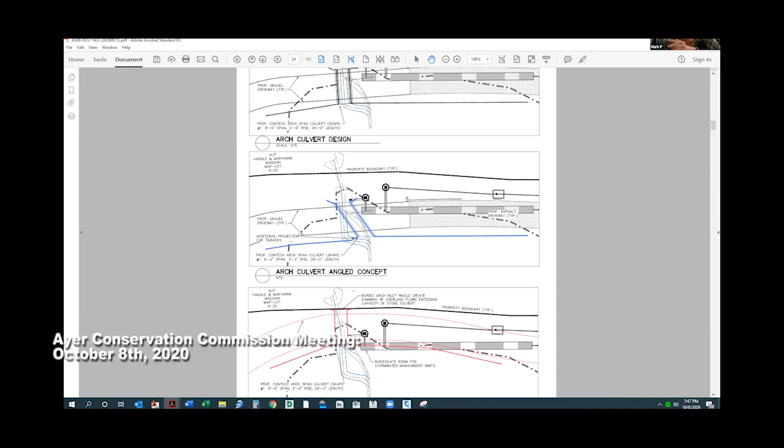Going back to the middle design, the angled culvert, the reasons you state this was not selected: increase of culvert length, width, and height, increasing footprint and disturbance; constructability conflict with wing wall tiebacks, further increasing disturbance; and practical construction tolerances for separations from the stormwater management system and water service line. The water service line is a line that crosses as part of the accommodation of infrastructure for the future residential lot.

So in brief, what happens if we start to turn this culvert is it becomes more difficult to construct, number one, and more costly, number two. And what we're trying to say by doing that is what we just left and came to this point to look at: the significance of this stream channel, which connects the BVW to an upland area, which are otherwise disconnected resources.

If we look back at the Oxbow habitat evaluation done in 2017 on this existing stream channel, it's not of good quality, not of any significant habitat value. What we put back when we install our culvert will arguably be much better habitat for anything crossing it. So by trying to preserve what's scrubbed in here, my argument is, number one, it's not a significant resource, and number two, it burdens the project with additional complexities which are harder to construct, result in more overall disturbance, and would probably require a different culvert system.

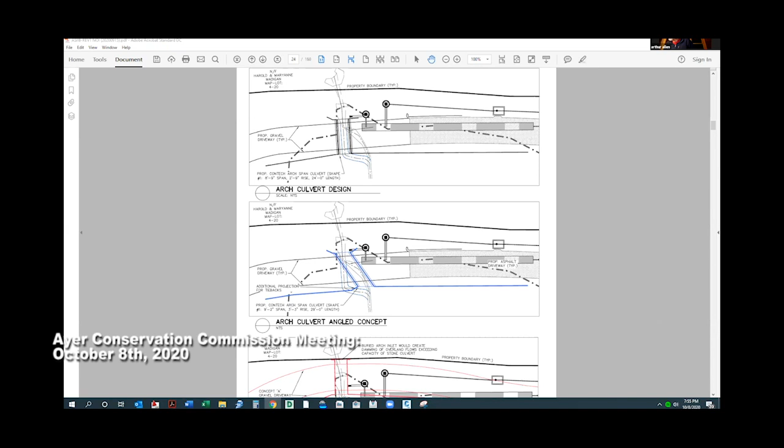If we refer to 310 CMR 10.54, the general performance standards include habitat characteristics, which I agree are negligible on this section of the stream.

But there are also physical standards for the bank, such as physical stability, water carrying capacity, groundwater and surface water quality. I don't see in his narrative that he specifically addressed those, but that's essentially why I'm saying this section of stream and stream bank has value under the Wetlands Protection Act.

The way that the stream crossing standards are integrated into that is that they say in 10.54.6 that the presumption of compliance with the performance standards for bank are presumed to be met if you meet the stream crossing standards. So it's not just the wildlife habitat characteristics we're talking about, it's also the physical characteristics of the stream bank that are in the performance standards and presumed to be met by compliance with stream crossing standards.

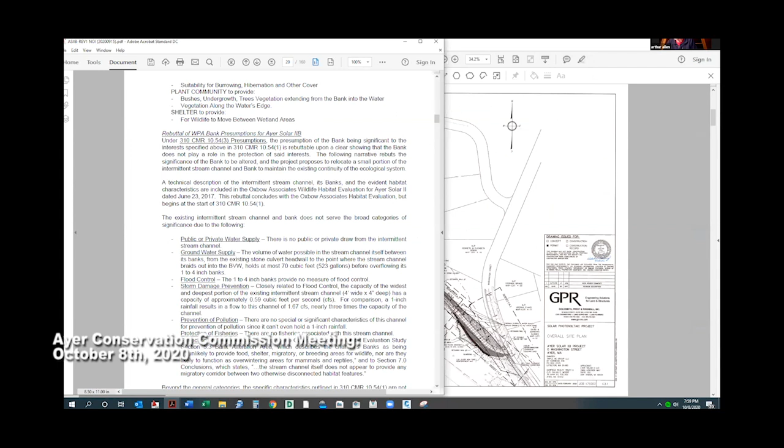I've actually never dealt with a case where it's proposed to meet the standards by realigning the stream and restoring it. Not that it can't be done, but I haven't dealt with that, and I don't know how DEP would view that. At this point I would really have to defer to the commission, noting that the reconfigured stream would meet the standards in the realigned stream, but they're not spanning the stream in its existing location.

I also asked Mike Andrade, who I believe is on the call, the peer review engineer, to opine on the feasibility of the angled culvert to preserve the stream crossing. I don't know if it's a good time for Mike to jump in, but he did have some comments on the feasibility of the angled culvert.

Chairman, if we could get to Michael, if I could just make one point first about what we're proposing, so that's clear to the commission. Art is correct about many things, but what we're proposing is the rebuttal of the bank presumptions, where in general standard number 4 it says where the presumption set forth in 310 CMR 10.54.3 is not overcome. So we are showing piece by piece, line by line, why this bank would not actually meet the presumptions set forth in 310 CMR 10.54.3. I just want to make sure we are clear on that.

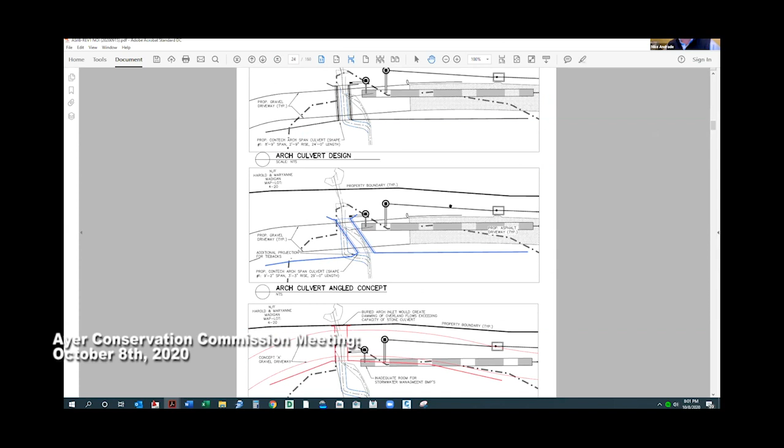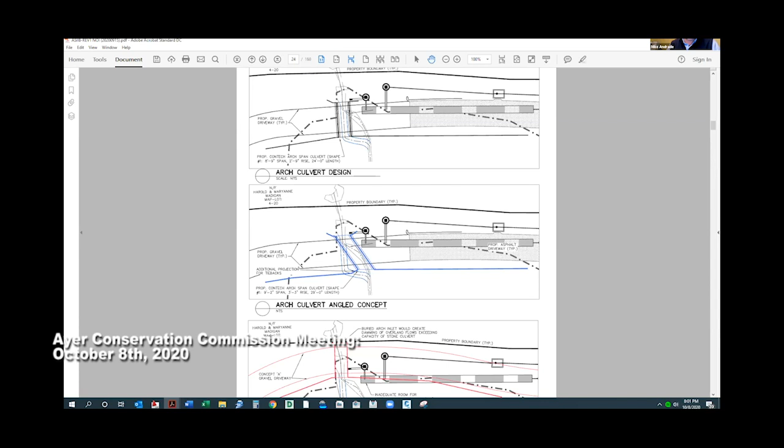So I have a letter dated October 6th which you should all have. And I'm down to a couple of minor issues myself that could be conditioned, in my opinion. We should maybe talk about item 20 a bit later, and my thoughts on that. I was asked to opine on the culvert configuration. Basically, in summary, the straight, which is proposed, versus the angled concept, they're both constructible, both feasible. In my opinion, the angled concept might result in more earth disturbance. It would require, based on the current design, some stormwater adjustments. But I don't see that it complicates the project any further. The site and design are already rather complex given the constraints of the site.

It would require some changes to the stormwater design, I'm sure. But to me, it comes down to it's probably a cheaper alternative to do the straight culvert because it's a smaller culvert. But both are equally constructible, in my opinion and experience. Angled arch culverts, we see them all the time. They're not uncommon. Thanks, Mike.

Kyle, this is Mark. I guess in my opinion, my background basically says if we're provided a standard, we're supposed to meet that standard. We can't build anything that doesn't meet standard. But that's not what we're talking about, Mark. We're not out of compliance with the standard. Well, I guess I'm interpreting the standard that it should encompass.

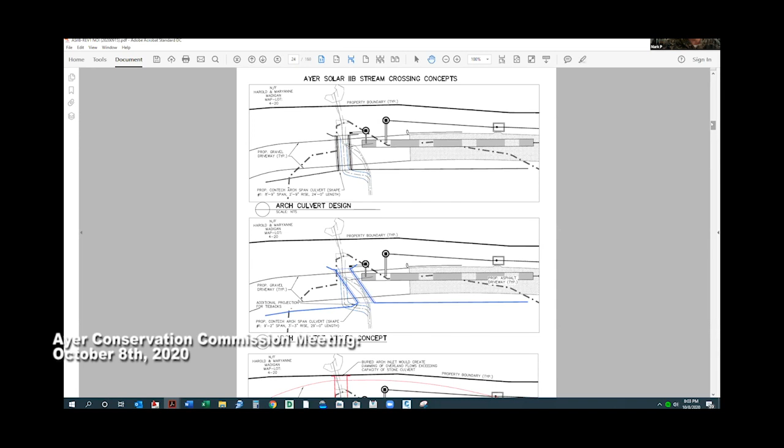It shouldn't, in my mind, move the stream. Have you looked at the stream to understand the characteristics of it? Could we hear what Mark finishes saying first?

And again, I'm just one commission member, and if we were to build something out of standards and it did not pass muster or failed, the DPU, PUC, they would have our heads. Again, the way I interpret the standards, and you can tell me I'm wrong, it's been gone back and forth, and Art described the case there that an intermittent stream with no water, where the center line is basically the banks, that's been refuted also. So we can go back and forth. In my mind, I think the angled concept is really the way to go. That's my opinion. I don't know if any other commission member has a view.

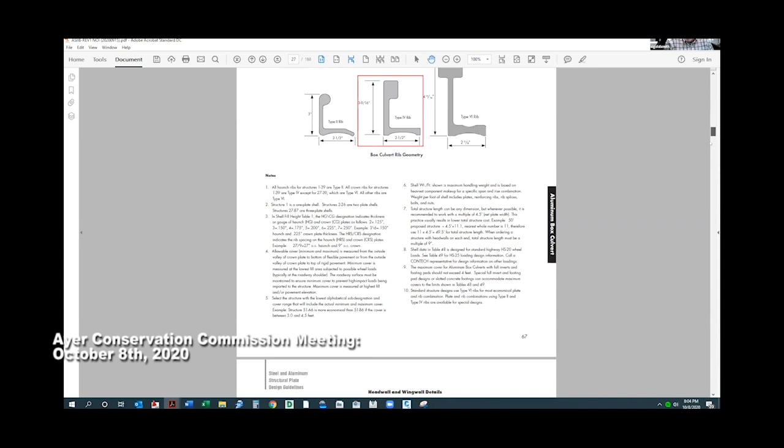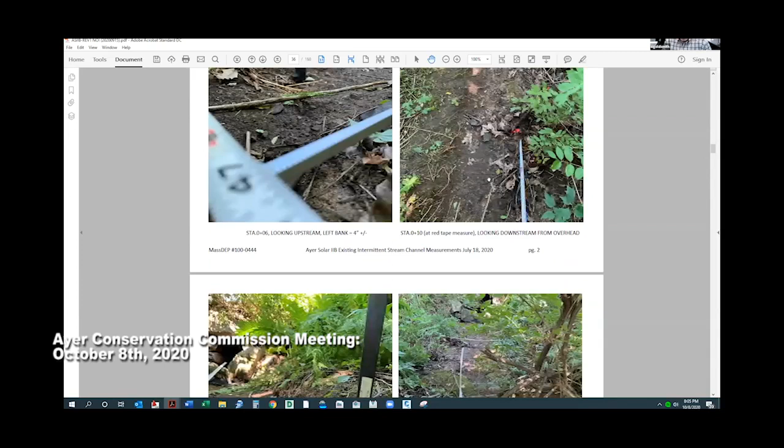Yeah, could I speak for a minute please? I've been listening to this, and I understand we're getting all caught up in the technicalities of this. The fact is, it's really not much there in the way of value for the stream crossing. And when you go and do the construction, it'll be very unlikely that this stream crossing, where this crossing is going to go, will be undisturbed by the time construction is done. It's just not the reality of how these things go. So wherever you put it, it's going to be reconstructed.

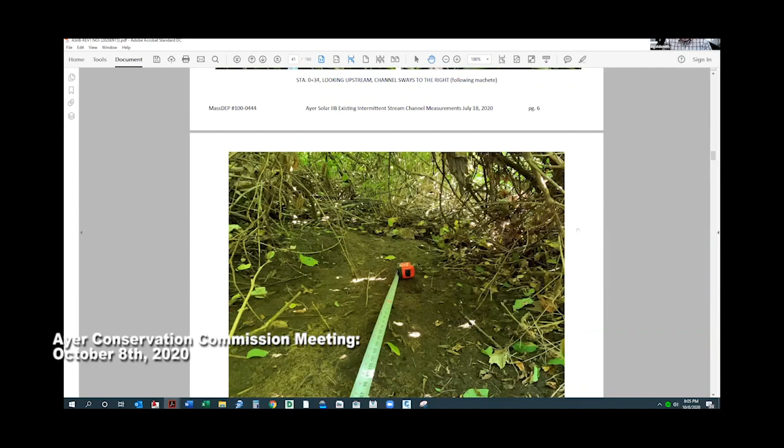So the question then becomes, is it worth going through the extra effort and complexity of trying to put it on an angle like this, if the net result of what you get is going to be effectively the same, and in both cases will be better than what's there now? So we're asking you to be a little reasonable, and we're also saying that the regulations as written contemplate being able to rebut the value of a stream crossing just for a case like this. I don't think you should neglect that or turn away from it because it sounds too complicated. You're certainly not doing anything untoward, or something that somebody would come and have your head over because this crossing goes straight across instead of on an angle.

I mean, that's just not realistic. I believe that there are a lot of commissioners that feel that stream crossing, or that stream, has value, and that it's our job to protect it. So you think the Oxbow report, that looked at it piece by piece, is inaccurate then? I disagree with it. The angled stream crossing is the way to go. That's how I feel.

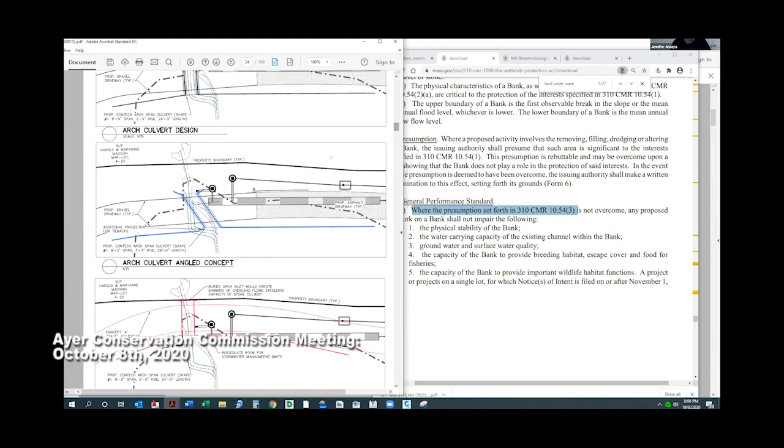Okay, could you go back to that drawing that you had up there, page 24? Yes, sir. Just while we go back to that drawing, I wanted to let everybody know we have Ken Diskin, 180 Washington Street. Thank you, abutter to the project, and I've been following the project since its inception.

And I appreciate the discussion about the stream crossing and all the technical aspects that were pointed out by both Kyle and the applicant's engineer, and the rebuttal by the consultant to the Conservation Commission. But in practical terms, and I happen to have pretty good knowledge of this, I would definitely agree that they take the side of the applicant in this case, and that the straight configuration would be the answer.

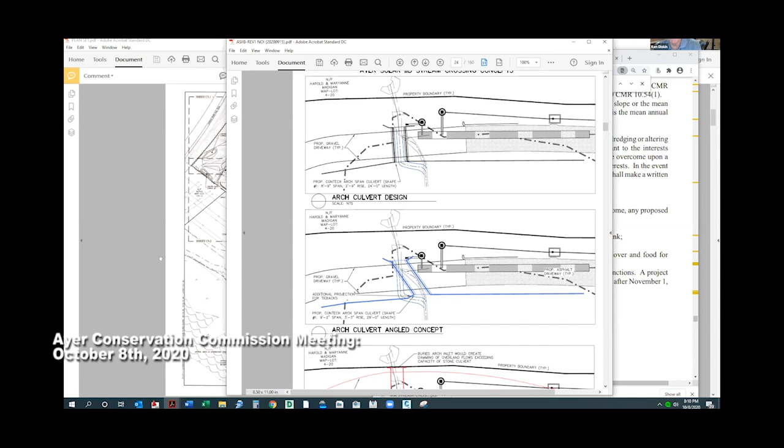But I have more to say about the whole layout there in that particular location. My concern from the beginning, and all of our abutters' concern in the beginning, has not been the small aspect of the stream crossing, which never came up the first time around, but the fact that how do you do this type of construction at any depth through this wetland area without impacting more than what is shown in the drawings? It's never been our concern that the drawings weren't great. Our concern has always been that the impact shown on the drawings in plan view and elevation and section will not, in fact, be what happens when machines get in the field.

And if you'd stay in that 24, I'd appreciate it. Okay. So I think the commission's challenge is much, much more than the stream crossing has been from the beginning. And the challenge is really tree removal, grading, the whole cut and fill, whether the material subsurface is sufficient to put this kind of construction in place in the first place, without it being much, much deeper foundations, inappropriate material, on and on it goes.

So I would have liked to have seen soil studies right through the whole construction area of the culvert to know exactly where the footing is going to land, where there is suitable construction material. Taking this page 24, which I'm glad you guys cut out, I had a couple other comments. First of all, I've also asked Kyle this in the past, but it was a long time ago. If you look at the first drawing, you'll see very clearly he's showing the property boundary there and the existing culvert.

It seems to me any practical person would have asked Mr. and Mrs. Madigan and his son that they should get permission to step off the property and repair the entire culvert system from beginning to end, not think you could drive a machine to install any kind of work on a culvert that's been spoken about many times by the applicant as ready to collapse. I don't see how you could possibly do the job without extending an invitation to the neighbor, and I believe there's an easement there for maintenance. The easement goes right across the property for the culvert maintenance. So it would seem practical the applicant would just reach out, and I'm sure they'd say yes, and create a drawing that solves the whole problem at the same time. You wouldn't go in and spend a million dollars on a road and all this work without fixing that mess right there, where you're going to drive over it many times during construction, and it's going to get wrecked anyway. So that's my opinion on that.

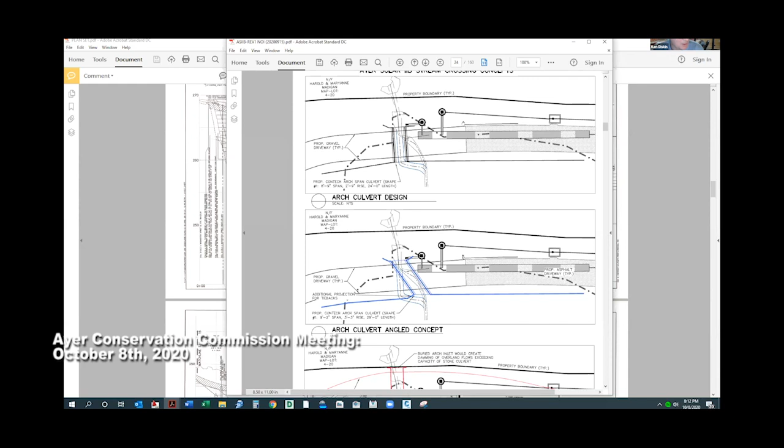The other comment quickly, which I'd like the applicant to consider while I have the floor, is if you look at the first drawing, you see where he clearly shows the end of the pavement line. This is a question for Kyle and company, and GPR - why wouldn't you extend them? I had these notes written down to talk about the drawing, number C4.5, which gives the details, but it's clearly shown on page 24 that if you extend the pavement to station 600, which is beyond the culvert, it seems practical construction-wise that you'd want to pave across the culvert, the new crossing section there, and create a section of paving that would take you to about station 600, where you're beyond the retaining wall work and all the structural work that needs to stay in place.

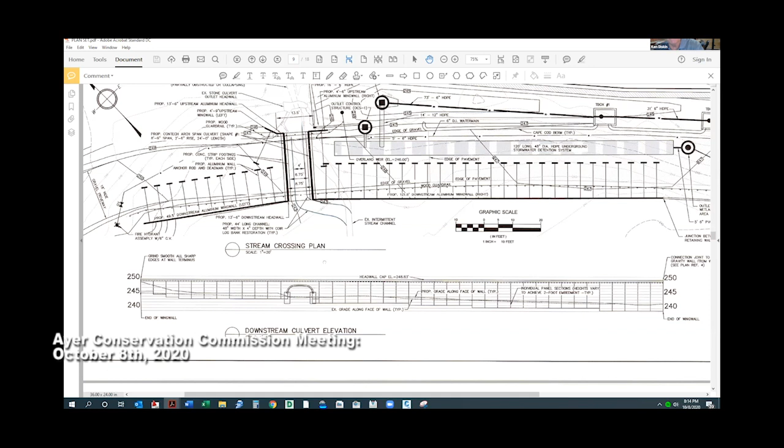5,000 is low. I just think it'll always be more than what's really seen here on the drawings, and the commission has a really difficult time trying to make that kind of judgment call. I understand the engineer's design and the practicality of trying to do it, but it's pretty hard to do things in a straight line - this drawing doesn't even show the silt fence line, the hay bale line, whatever is south of the work. It doesn't show either side of it, actually, it just shows the crossing plan. But practically speaking, you'd need to see the entire construction, fencing, hay bale location, whatever the perimeter of the work is, and really know it's all going to fit in that tiny spacing down there. I see it on the plan, but I don't buy into the fact that you can put machines in there. And that's what I have for tonight.

But thank you, we need to move on. Thank you for your comments. I didn't see what you held up, Jen. How much time do we have? We're at time for this. We are at time, yep.

All right, well, clearly we're not going to come to a decision this evening. We still need to talk about tree topping. Any other comments from commissioners at present?

I was going to say, I was hoping we would return to the tree topping. I know, Kyle, you went over that very quickly, but that's not a done deal for me on that one. Fair enough, it just seemed that way from the comments. I didn't mean to gloss over it, I just wanted to mention it was a very important subject. The results of the comments were that it seemed like it would have no impact, but of course the commission should discuss it.

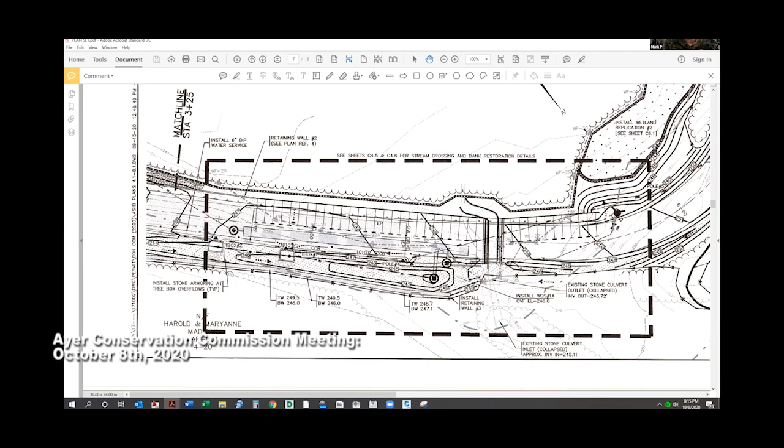Any other comments from commissioners? Jess, did you want to say something about the tree topping? Do we want to go over just a few more minutes, John, or do we need to stay on? We could probably go over a few minutes, but I don't think that's going to do it. We might have 2 extra minutes, but we've got an awful lot to get through on the rest of the commission.

If Rohit is on the call, I know he had something he wanted to bring up to the commission, and I'll leave it with him whether he thinks this is a good time or not. Are you there, Rohit? Are you there, sir? I haven't seen him come on. I don't see him. Jess, did you have a quick statement about the tree topping you wanted to make, or no?

In terms of minimizing impact to BVW and wetland areas, cutting a swath of trees that are all going to die, even if it's quote unquote creating another habitat, for the amount of gain on that from the solar production, which for the southern section was like 1.3% annual increase if you didn't cut the tree top versus non-tree topping, it was a negligible difference. I'm in your camp also. I think that southern section is really a non-starter for me on that.

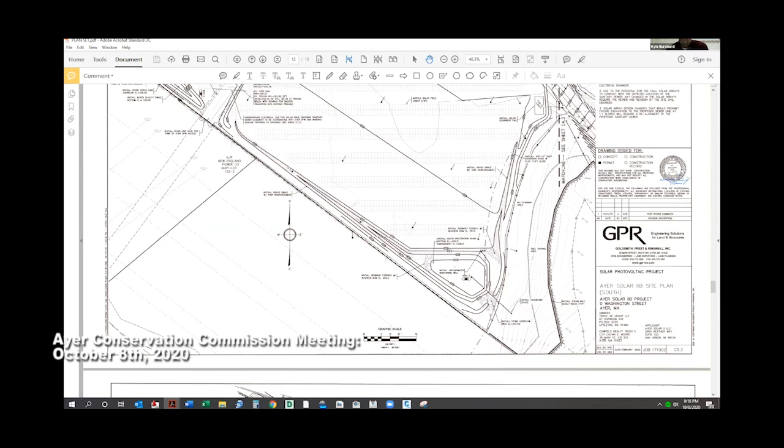If I may, Mr. Chairman, the Blandings turtle with NHESP, I've been talking with David Paulson to finalize his letter, and we would like to discuss that further with the commission. As I understand it, the commission may be receptive to taking the conservation restriction. The 38 acres that will be put into conservation restriction is part of this project now to obtain the no-take letter from NHESP. The letter will have the conditions that the conservation restriction has to be maintained and taken over by somebody, but that represents a no take. That's the intent of the project. So that's forthcoming, it's been in the works.

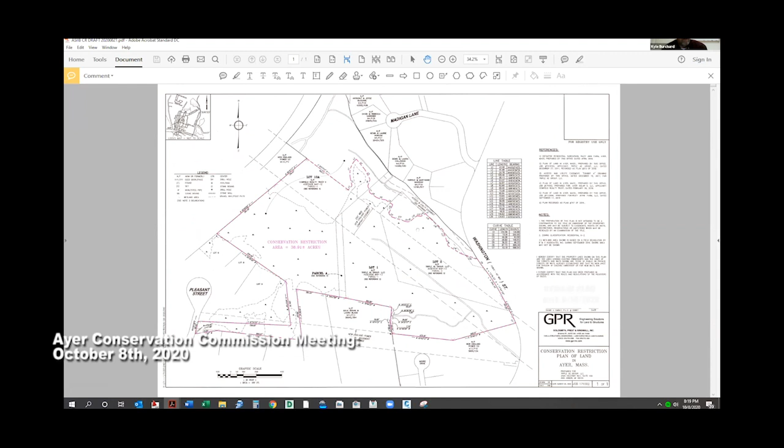This is generally what that area looks like. The outline of it is in purple. I don't know if you can see that.

Could I ask one question on that? It said you're looking for somebody to accept the CR and take over annual maintenance. When we've done other open space residential developments, we've made arrangements that if we take the CR, it doesn't become an additional expense for the town to pay for the monitoring. That's incorporated into, say, a homeowners association. So would this be something you'd be asking the town to take up that annual expense on?

I think the agent has more information about that than I do at the moment. I was hoping Rohit would join us this evening. He and I have had some very good conversations about this. He's looking for a home for the CR, and I really don't want to speak for him, but there are reasons to think we may be able to work something out.

Yes, I am on the line, so I don't know if you can hear me. This is Rohit Garg, and yes, Commissioner and Conservation Commission Board, as Joanne has said, we are in preliminary conversations initially, and we would like to continue to dive further into what the CR would look like with the town agent prior to coming back to the commission for a formal request. Some of the questions asked, we just need a little more clarity because we're in initial preliminary discussions right now.

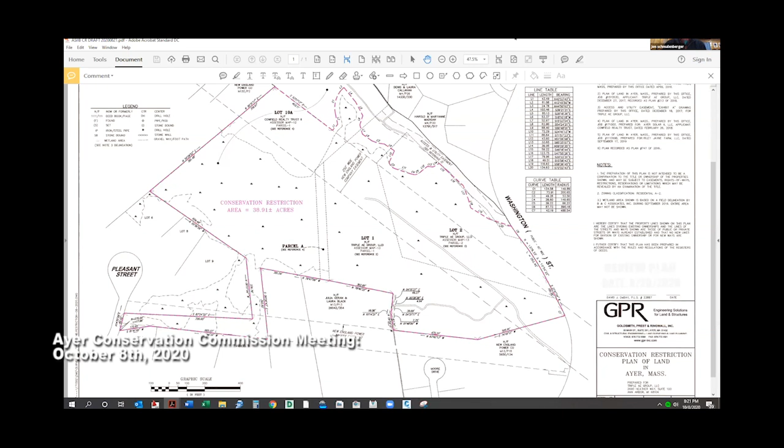Okay, very good. We're over by about 5 minutes. I don't see that we are done with this conversation on the stream crossing, the tree topping. So I would propose that we continue until the 22nd. Any discussion on that?

Just as keeper of the agenda, we had blocked off half of our meeting on the 22nd for other commission business, and it looks like we may have to move that agenda item to a different day if we're going to accommodate another lengthy discussion about this project. Just so you are all aware.

Well, I think this is an important item to be discussed, and possibly we need to just move our business on the 22nd and speak about this at length. Yep, I agree. So is there a motion? Any other comments from commissioners or citizens?

Mr. Chairman, go ahead, Ken. Very quickly, there probably hasn't been and probably may never be a more complicated project for the Conservation Commission to consider. So despite the fact that you are in a pinch for time, this needs a lot of attention. So I just comment that as the public. And it's unfortunate we just can't get more people on the Zoom meetings. It is what it is.

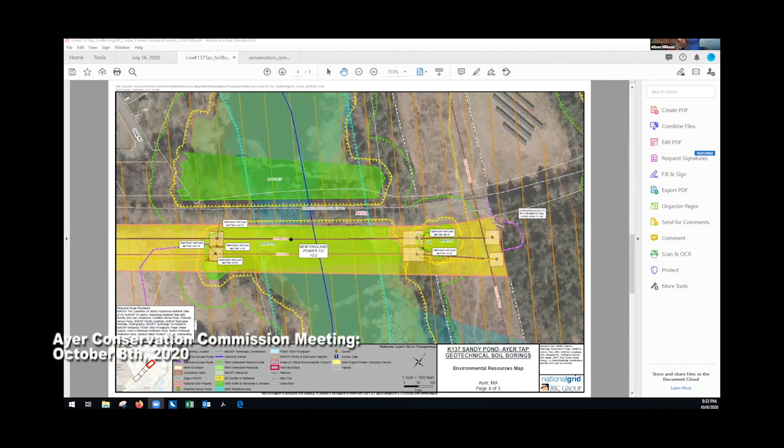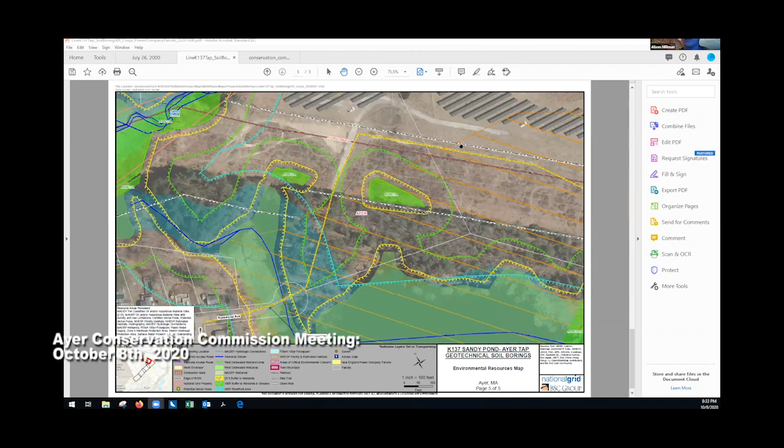And this is the last location where we have wetland impacts, and we're showing the yellow parcel owned by New England Power. And this is the last area where it's the access road that's existing, but we do not have any matting or borings in that location. So that's a summary of the findings of the ownership and the parcel.

All right, that's really helpful to me. So I think Allison and I can finish sorting this out, and my suggestion is that I just prepare a new order of conditions for you all to sign. I think that would be the simplest thing to do. The one that you did sign hasn't been recorded, and can't be recorded the way it is.

Right, and we don't physically sign it, so you'd be signing it on our behalf. So can we vote to approve those administrative changes pending your production of a new revised order? I think I would prefer that you guys at least see what this looks like before you vote on it. That does add more things onto our...

Oh, I know. The little additions at the bottom of the first page that Allison was talking about - town counsel isn't sure that DEP is going to approve that. The DEP is very territorial about their forms.

We can leave that for DEP to sort out. We'll find out one way or the other, won't we? Well, we will, and it will. Town counsel said it will come back to us. So, Allison, have the notations that Grace was asking for?

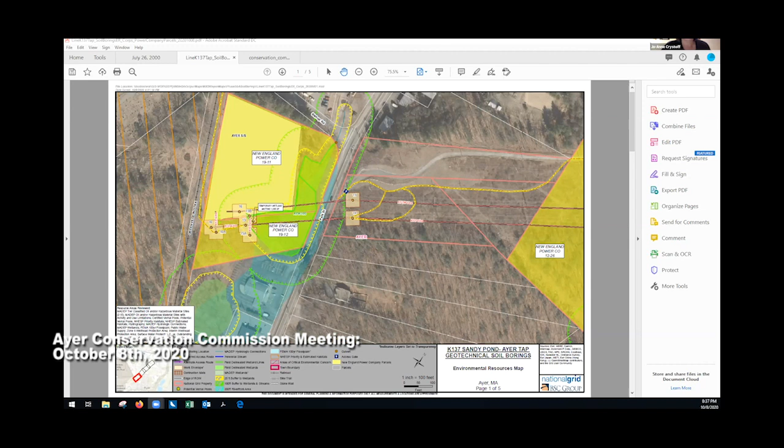We have an affidavit for one. Is that correct? Oh, we still have... yeah, I'm sorry, I'm working on it. Sorry. Oh, okay, I'm going as fast as I can. Oh no, take your time.

Take your time. Good night. Good night, thank you, bye. I'll talk to you Monday, Allison. Talk to you soon, thank you.

John, we have 3 minutes left. Thank you, oh boy. So for 150 Hemlock Drive, we have a request for certificate of compliance.

We have an as-built plan. Your agent went and made an inspection with the homeowner's permission today, and we have everything we need. And we have the affidavit, right? Yep. And I have here, sitting next to me, a completed certificate of compliance, ready for you all to electronically sign, which I've already done for you. And we can get that one on its way.

I see Desheng is joining us. Hello. Hi, Desheng, it's been a long time. I know, it's nice to see you all. Nice to see you too. Yeah.

So there were originally 9 requests for certificate of compliance sent to the commission. We didn't have affidavits for any of them. That's a requirement in the order of conditions - that the new owner be notified that there is an order of conditions on their property. And as I say, now we have an affidavit and we can issue the one.